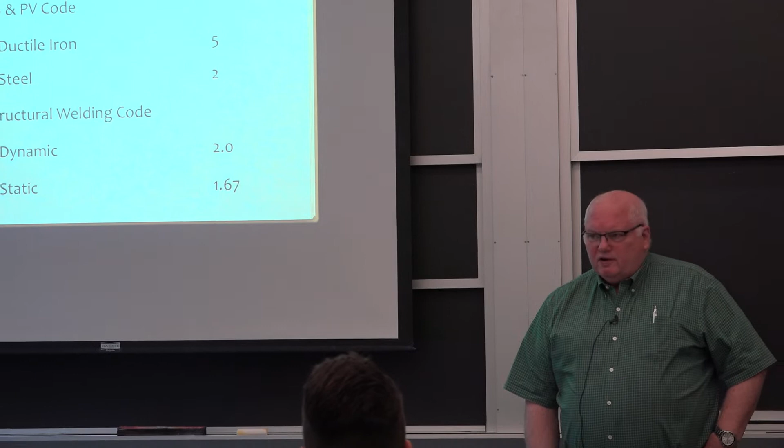I thought for structural materials, rather than talking about Harvard and MIT and things like that, we could talk about factors of safety. You're a mechanical engineer, how many of the rest of you are mechanical engineers? Okay, so 3 out of 5 of you here are mechanical engineers.

So what do you understand a factor of safety to be? The amount that you'll build or tolerate something to, so it's the maximum threshold you'll operate at, and then however many extra factors it can theoretically go to until it breaks. Right, that's your factor of safety, so it's the capacity or capability of strength, if we're talking strength of materials.

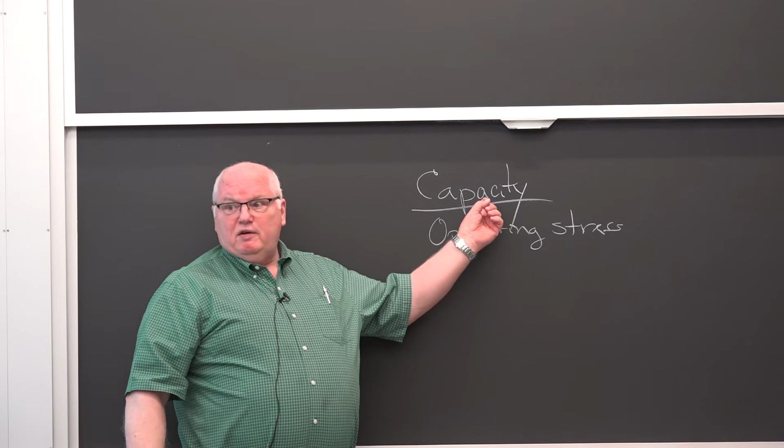Dr. Belmar, being more of a mechanical engineer, calls it the capacity divided by operating stress. So if the capacity is a stress, how much does it take to break it, or fail it? You have to remember, in some cases failure is not breaking something. A lot of times we think of breaking something in two as the failure stress, but you could have failure if something starts to deform, which would be the yield stress.

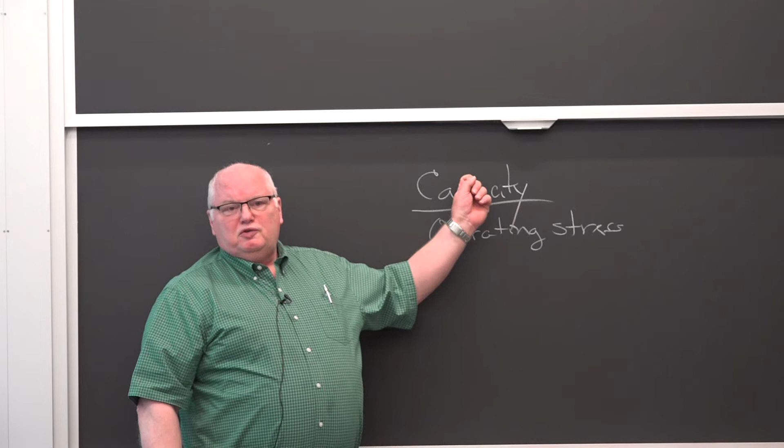And the operating stress is often defined by a code or standard. We're going to go through that, I'll talk a little about it, stop me if you have questions, it's supposed to be a recitation after all. The capacity is the capability to support a stress, and the operating stress is what you'd calculate from mechanics as your nominal stress, often defined by some code or standard that's been around a while.

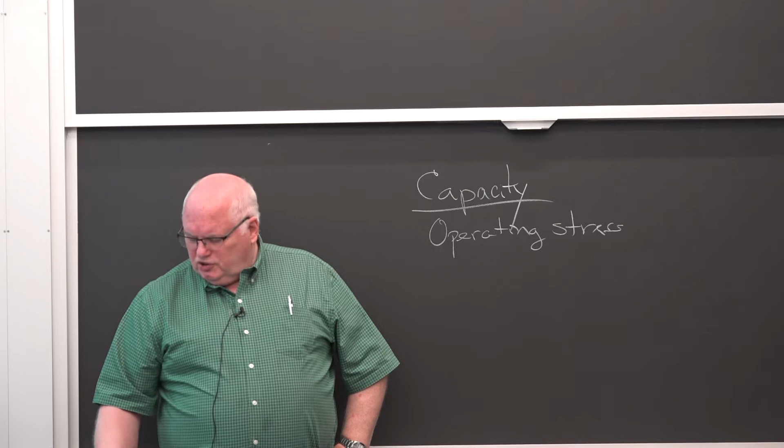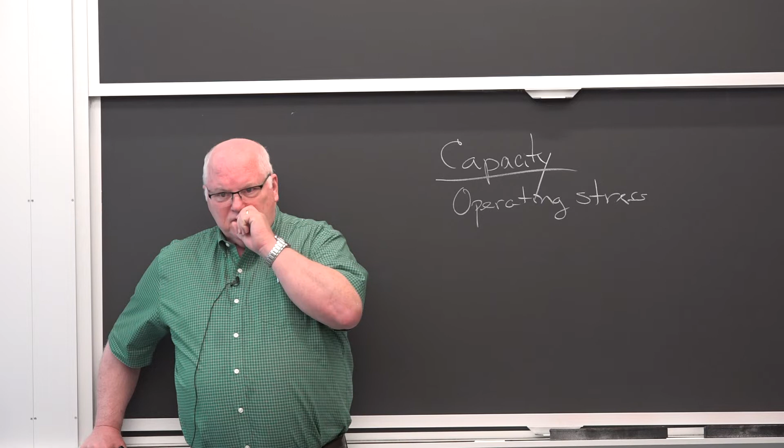The oldest factor of safety I've seen, some books go through and talk about bridges, a couple of books on the history of engineering written by civil engineers. Remember, civil engineering - if you watch that thing where I talk about the history of engineering, the first engineering school was West Point in the United States, and it was military engineering. The next engineering school I've learned since, it's not Rensselaer, it's actually Norwich in Vermont, which had an engineering program in 1820, and RPI wasn't until 1824. But RPI is obviously a more well-known engineering school than Norwich now.

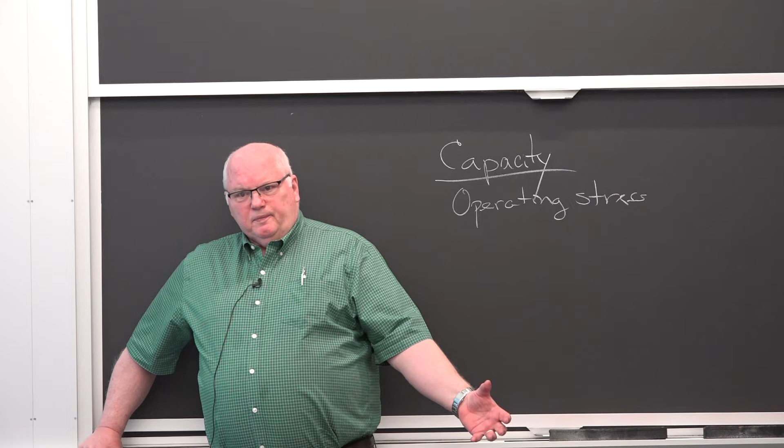Norwich is still a small school, a good school, but smaller. Anyway, it wasn't until the 1820s that they both came along with something they called civil engineering, to distinguish it from military engineering. Originally engineering was military - building breastworks, dams, and bridges for catapults and things like that. Then with the Erie Canal, Norwich and Rensselaer being near upstate New York, started producing students who could help build the Erie Canal.

And so civil engineering was really the only main type of engineering. It was really MIT in the 1860s that started breaking things up - number one at MIT, course one, is civil engineering, okay? But the bridge designers - and I did find some references about 1850 - had a factor of safety because they were just beginning to be able to calculate the strength of a beam. If you go back, Galileo has a picture of a weight hanging off a beam.

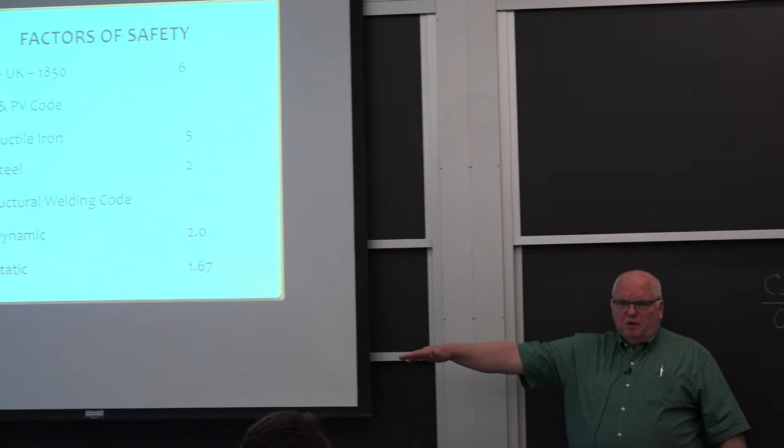He was doing experiments, kind of Galileo's way of doing things, to understand the strength of a beam. They started developing those equations in the mid-1800s, so they could calculate, kind of like a sophomore in mechanical engineering, the strength of a bridge, and they found a factor of safety around 6.

About that time they actually had a commission in 1850 in Britain that determined they should have a factor of safety of 6, because before that it was all sort of, well, I built one like this and it didn't fall down for the last 50 years, so I'll build one similar to it. Then someone would come along with a different material or design to save some money or time, and the factor of safety would go down and things would get worse and worse. History has a way of repeating itself.

You've all seen the Tacoma Narrows Bridge failure. The Tacoma Narrows Bridge failure in 1940 was an example of making things too slender. The winds came down the Tacoma Narrows, and this thing they called Galloping Gertie. I saw it in my freshman physics class here at MIT, and they were teaching waves—you see the waves on this bridge.

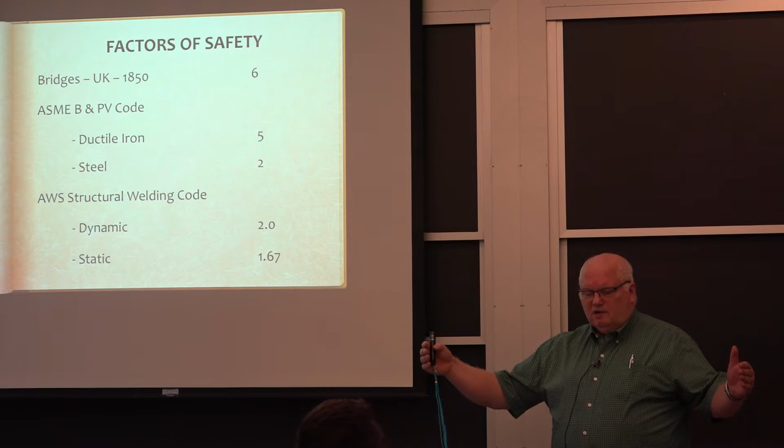But the boiler and pressure vessel code actually came about—I used to have a picture, I probably ought to go dig it out again—of a shoe factory down here in Brockton, Massachusetts. The boiler blew up, kapow, around 1905 or something like that. And the ASME decided we're getting tired of this.

Turns out the first research contract ever let by the U.S. government was in 1836 or something. Some steamboat on the Ohio River blew up, and Congress actually appropriated some money for someone to go figure out why these boilers were blowing up and killing people.

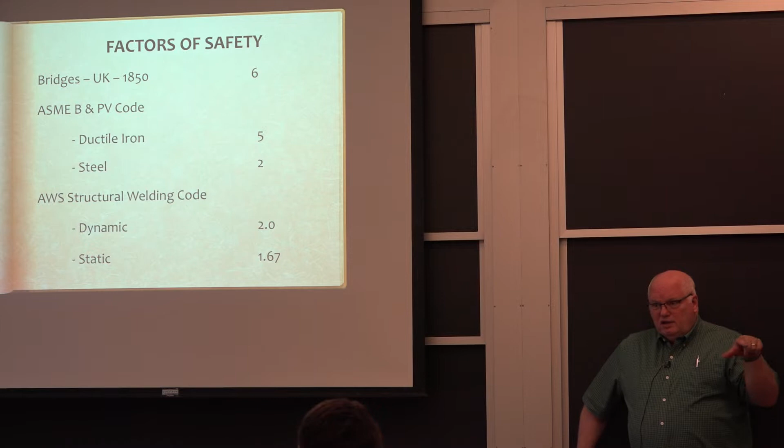So pressurized boilers—you know the Barlow formula, sigma equals P R over T, right? Pressure times radius divided by the thickness. Those types of equations were around, and the boiler and pressure vessel code is the world code today.

There are some countries that don't use it. Mainland China doesn't use it because they don't want to spend $16,000 to purchase a code. They basically have their own codes, and they sort of copy what's in the boiler and pressure vessel code, and they don't care about copyrights and things like that.

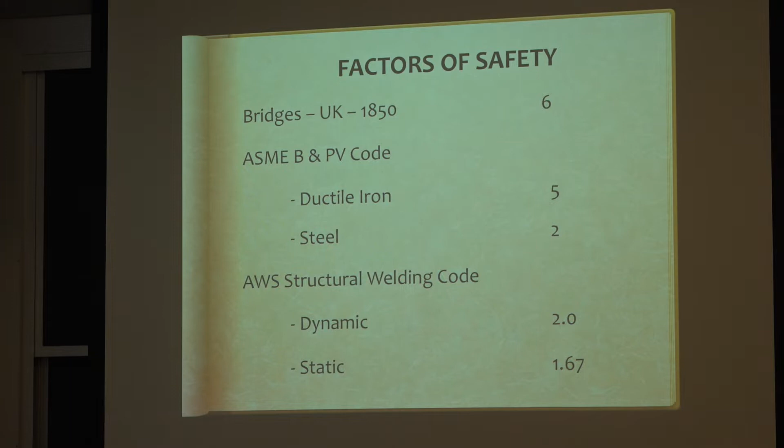But you can't make a boiler or pressure vessel out of gray cast iron because gray cast iron has lousy fracture toughness. You can make it out of ductile iron, which is almost like steel, but even so, ductile iron being a casting can have larger flaws, and they require, even today in the code, a safety factor of 5. Whereas typically for steel—and there are different safety factors, the code will have different requirements for different nozzles and connections—but generally for steel it's about a factor of 2.

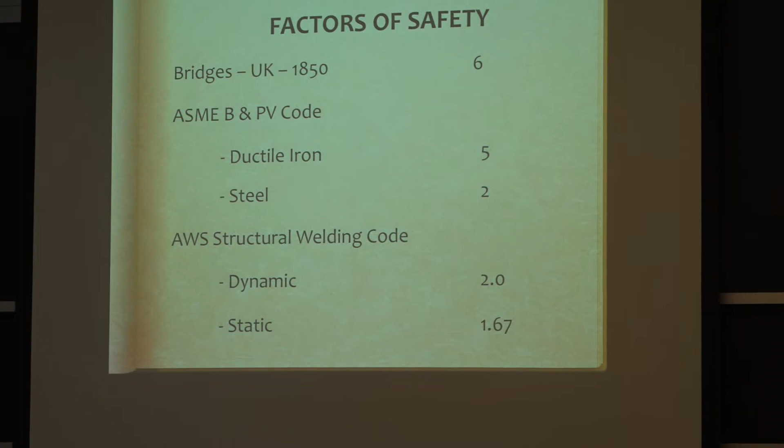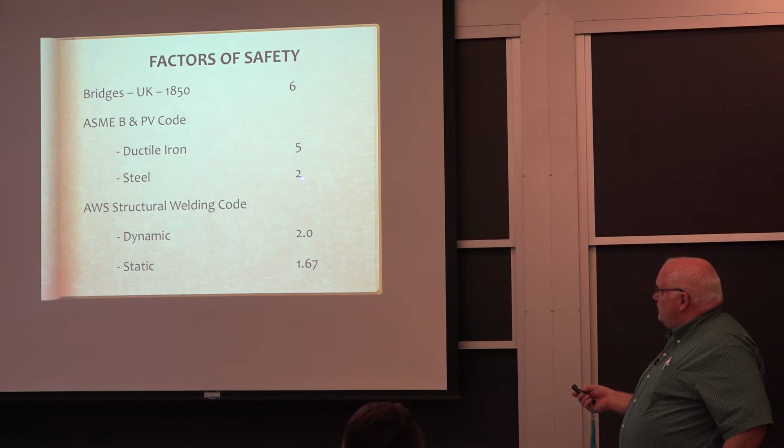You can say, well, is that based on yield or on tensile? It's sort of based on tensile, but if we're talking A36 steel of 36 KSI yield, it turns out about 18 or 19. They have a table, and it depends on the specific steel—there's lots of experience over the years. But it's basically 55 or 60% of tensile, which gives you a factor of 2 of safety. If you go through this, the operating stress is 55 or 60% of tensile. When you get to higher strength steels, things change a little bit, but in general, a safety factor of 2 is good for steels.

Why? Those of you who are mechanical engineers—what do you know about fatigue of steels? Do you know anything about fatigue of steels, and why they would choose a safety factor of 2? If you look at the old-fashioned S-N curve, where you look at stress versus number of cycles, you'll find for steel it comes down and tends to level out, and we sometimes call it the fatigue limit.

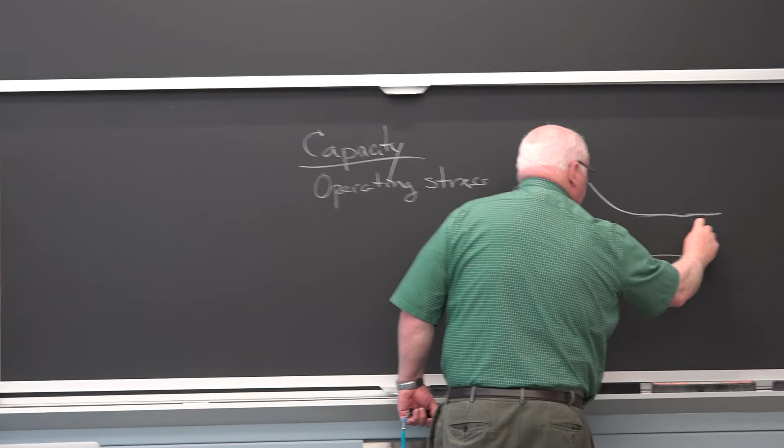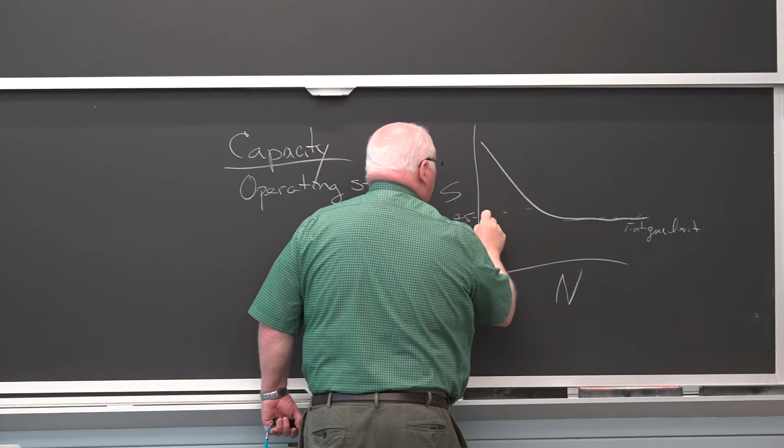It's at 45 to 50% of the, typically it's the tensile stress, okay? That just, now, aluminum doesn't have a fatigue limit.

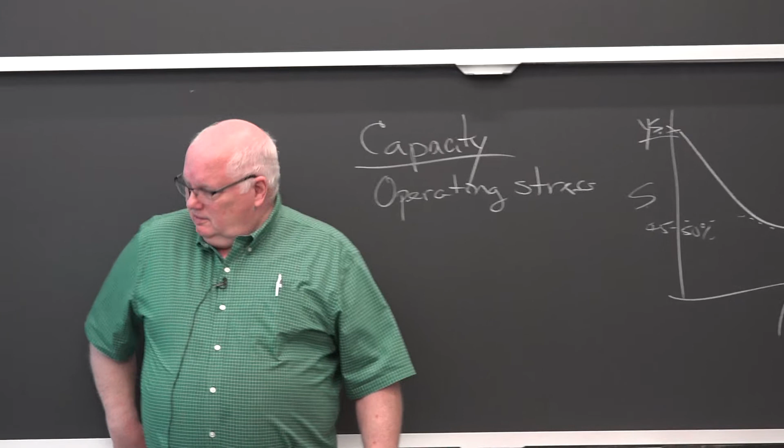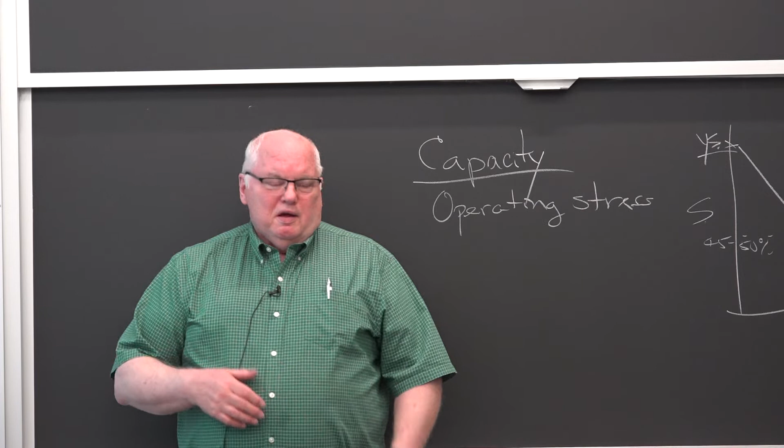You're putting enough work in the material, it'll heat up on you. So you have to be careful when you start going to such long tests. Usually, we're talking way out here at 10 to the 8th. Usually these plots only go out to 10 to the 7th. This little break is usually somewhere around 10 to the 3rd, 10 to the 4th, 10 to the 5th, so where that curvature is in there. So 10,000 cycles or so, we go from what we call low cycle fatigue to high cycle fatigue.

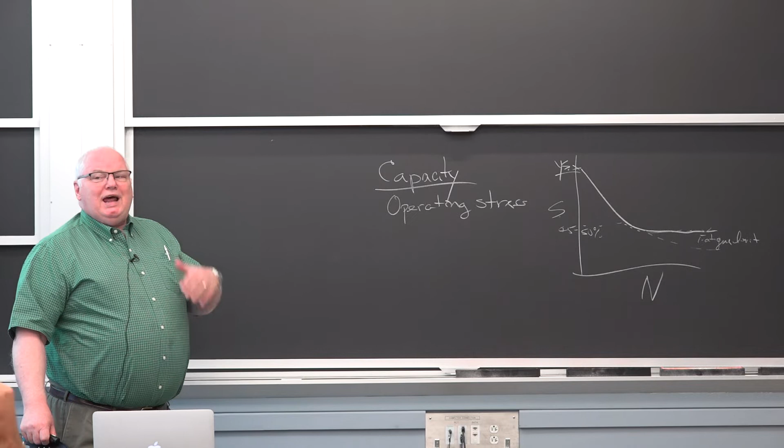You have a factor 2 safety and you're good, okay? You shouldn't have a fatigue problem unless you have stress concentrations and other things. So that's why we have safety factors of 2 for steel in the boiler and pressure vessel code. They have all kinds of things to take care of stress concentrations in the design, like reinforcements around nozzles and stuff. I've seen failures in pressure vessels.

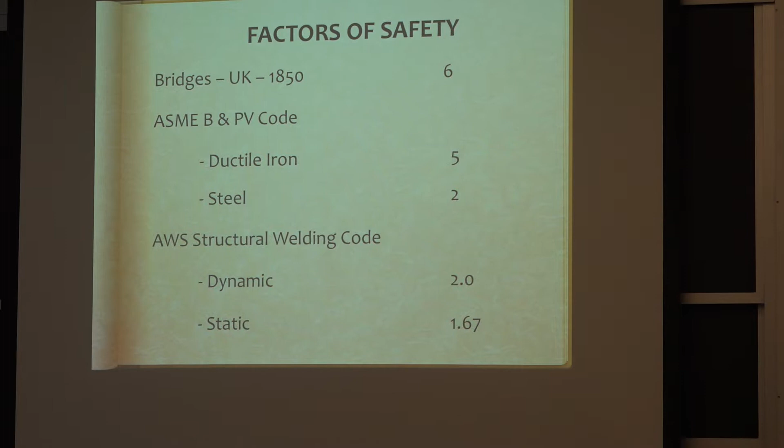Well, first of all, the boiler and pressure vessel code, virtually all of these codes in the very beginning, they'll have a scope. The first paragraph will be scope of this code, and it will tell, actually the first paragraph might be the first 3 pages in the boiler and pressure vessel code. It doesn't apply if you're less than 100 psi and 1.5 cubic feet, I think that's right, or 15 psi and 1,000 cubic feet.

Basically, it's pressure times volume. How much energy did you store in this pressure vessel? If it doesn't have much energy, we don't care, is basically what ASME says. The explosion won't be that big, okay? If it's got a lot of pressure or a lot of volume—I can't remember what the 2 numbers are right now, there's a couple of different ones—but basically, they're just saying with a certain amount of energy, you're going to have a big enough bomb that you don't want to be there if it goes off.

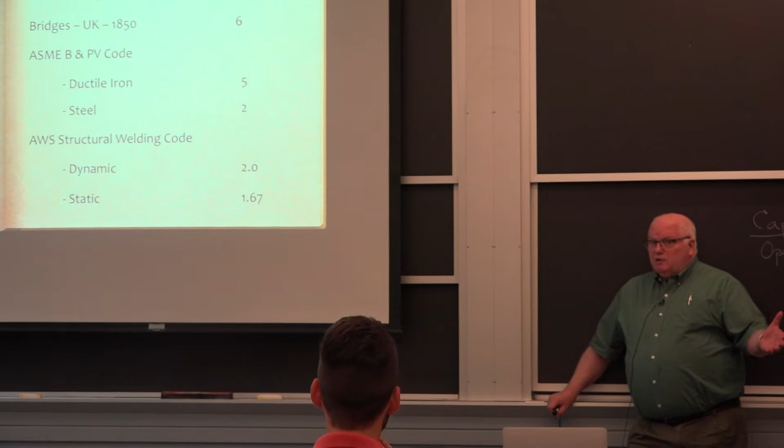The American Welding Society Structural Welding Code has a static and a dynamic. Static for buildings is 5/3. World Trade Center was 5/3. Okay, I gave you an article I wrote, and I used that 5/3. I knew that principle, it's in the code, and that building would have been built to the AWS Structural Welding Code.

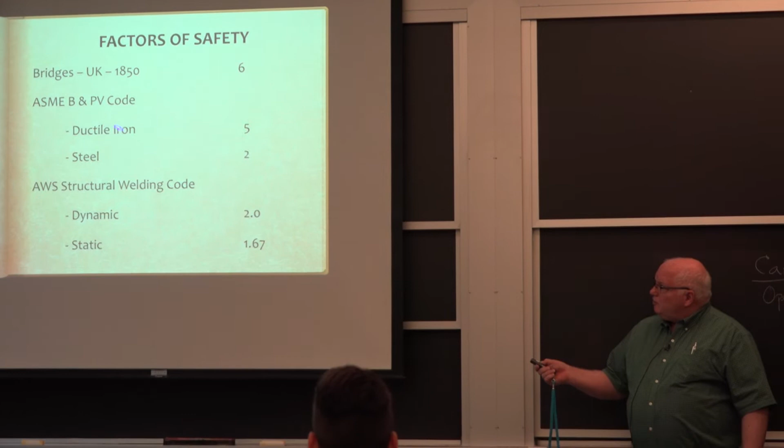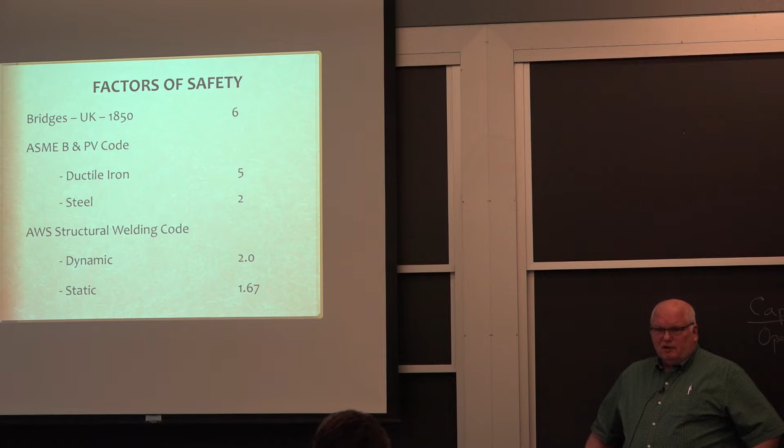These are the 2 major structural welding codes in the world. Almost everybody except the Chinese and a few third world countries uses the ASME code, even though it's a US code, because it's sometimes called the granddaddy of all codes. The AWS Structural Welding Code kind of is a companion to it, but it's basically has something for bridges, dynamic, and something for buildings, static. Bridges, of course, are dynamic with trucks going over them and things like that. Dynamic, why 2? Because you got fatigue. Buildings, it's not really fatigue, not at the high level of stress. So those things sort of make sense.

Then, OSHA for ladders and scaffolding, if it's man-rated—which means I got a cherry picker and someone's going to be up there in the basket—factor of 4. Someone could die. If it's in OSHA, if it's more than 6 feet off the ground, you got to follow the code, because if you start figuring out the energy of a fall, you can break your back from a 6-foot fall. You won't break your back from a 2-foot fall. There's not enough energy to break, unless you've had other problems health-wise ahead of time.

So man-rated equipment, ladders, scaffolding, these lifts, everything will be 4.0. Just an extra factor of 2 for a little extra safety. It's still the same steel.

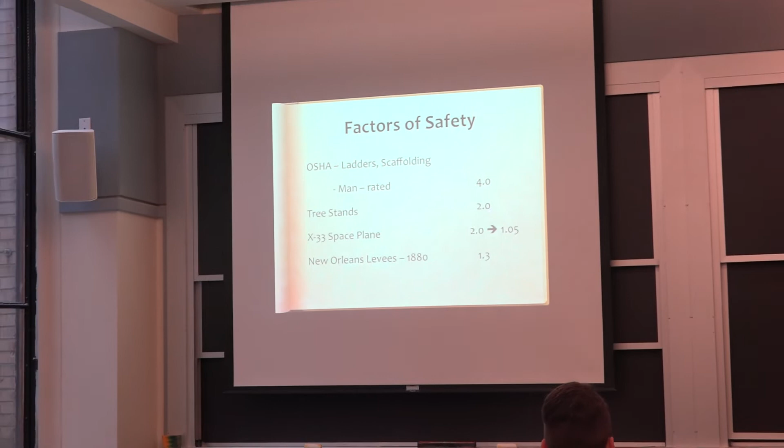Tree stands don't come under the boiler and pressure vessel code, it's not a pressure vessel. They don't come under that either, they have their own tree stand manufacturers association, and that's only in the last 15 years or so. But people are dying or being maimed by tree stands falling out of the tree with the people on them all the time, okay.

Oh, you're not a hunter, obviously. Neither am I. But if you were in Pennsylvania or Colorado or places where deer run wild, they'll go to the store and buy a little tree stand. There are lots of mom and pop shops. Some guy is a hunter who says he's got a better design, even though he doesn't know anything about design, and starts making and selling it at Cabela's or Bass Pro Shops. You carry this thing in, usually made of aluminum so it's not too heavy, climb the tree, wrap it up there, and sit and wait for Bambi to come by so you can blast him. Or if you're a really good hunter, you use a bow and arrow to slice right through Bambi's heart. Does that explain it? Okay.

Some of them have canopies. Some of these things get very elaborate. But it's something, if you don't have anything else to do with your life, you go out there and wait for Bambi to come by in the fall. The thing is, at regular ground level, the animals will smell you, and the deer know when hunting season comes, so they're more skittish in the fall anyway. But people will sit out there 8 hours a day in the cold, waiting for their buck to come by, counting the points on the horns of the antlers.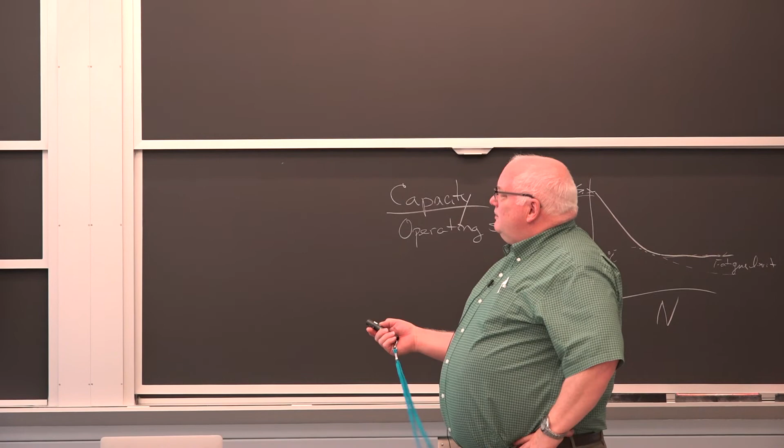The X33 space plane was supposed to replace the space shuttle. They designed it for a 2.0 safety factor, but had some bonding problems. I talk about it in some of my lectures, I don't remember which ones. But they had problems, and it was a $1.3 billion program.

These vessels that held the liquid hydrogen tanks were about the size of a house. I could have brought in the composite material, I have a piece of it. Very, very lightweight. Size of a house, and the basic structure weighed about 12,000 pounds. Very few houses are that lightweight.

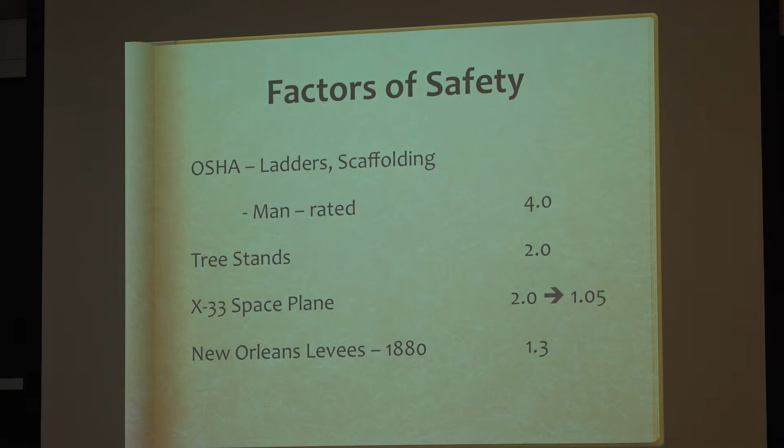But this had to go in space. They had some problems with the bonding of the carbon fiber and the Nomex honeycomb with the adhesive, and they didn't want to cancel the program. It was a rush program in the early 90s to demonstrate rapid prototyping, so they just recalculated their safety factor and found out they had a 5% safety factor. Good enough. So they put it to test in Alabama. The only place you can get 50,000 gallons of liquid hydrogen is Huntsville, Alabama, where they test rockets and things.

So they put it in test, and everything was fine until they started to warm it back up, and they were giving everybody high fives because they had passed the test. They were going to put it in a prototype and go from Edwards Air Force Base to Dugway Proving Grounds in Utah, get up above 100 miles, actually get to space and prove out the design.

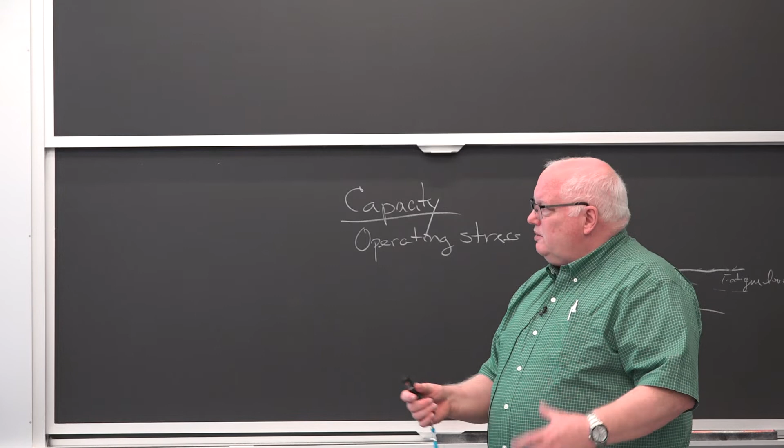But then they saw a pop. All the frost on this thing is on the video because no one's going to be near this - this is a bomb, okay, 50,000 gallons or whatever it was. I have to go back and check, but it's the size of a 2-story house. It split open. Nothing exploded, but then they went back and found they didn't really have their 5% safety factor. This thing was a disaster from the initial fabrication, and they were just hoping they could get it to pass so they could keep their $1.3 billion program going.

NASA canceled the program.

In 1880, the New Orleans levees had a safety factor of 1.3. One of the civil engineers designing those was my grandfather. So there, Grandpa, you needed a bigger safety factor. However, back then, they were lucky if they could even calculate the safety factors, but they did.

So there's something on safety factors to give you some idea of the different ranges. A safety factor, it's hard to decide what you want to call your capacity. Your operating stress will be defined historically by the codes and standards. And then it's really a question of what risk are you willing to take, okay? And if it's man-rated, you want a bigger safety factor.

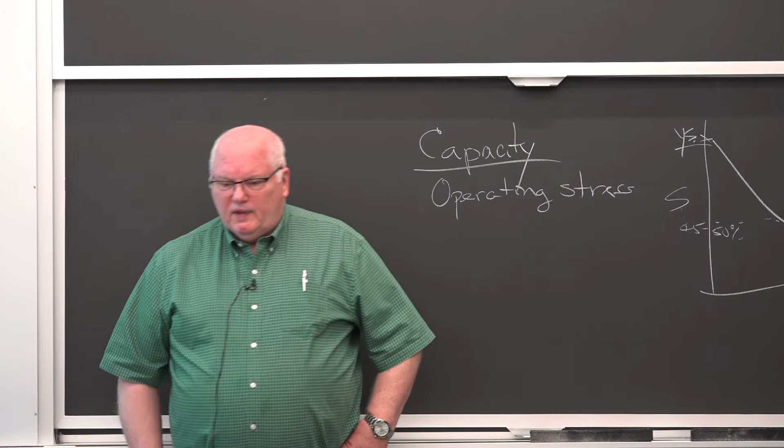I used to think, until I started working on them, that I'd never want to get in a helicopter. Those things are just, as they sometimes call them, flying fatigue machines, right? But as I got in and started doing some helicopter failures, it turns out helicopters tend to have a safety factor of about 10 on most parts. And believe it or not, they're weight critical, but they've had enough failures over the years that they do a lot of work. If you actually look at the designs and calculate safety factors, you find helicopters have tremendous safety factors, which is why most helicopter accidents are pilot error, okay? We could go through some of that.

Okay, so that was one thing. We could talk about safety factors. So just a couple of slides that I put together some time ago. Anybody have any questions? I could go through some other things.

What types of things are you interested in? I might as well, there's only a few of you, I might as well try to do some things that you might be interested in. So I gotta find my cursor. Where'd my cursor go? Well, I have something on bolting here too, but oh, here's my cursor down here.

Bolting. Okay. Anybody have any questions? No questions?

Okay, so I served on a committee about a year and a half, 2 years ago, commissioned by a department, part of the Department of the Interior, called BSEE, Bureau of Safety and Environmental Enforcement, or something. But BSEE is basically the part of the Department of Interior that regulates things like offshore structures in the Gulf of Mexico. They were the ones, their predecessor, they changed their name after the Deepwater Horizon, the BP Horizon failure in the Gulf, you know, the big oil well blowout. They had a different name before that, trying to hide afterwards.

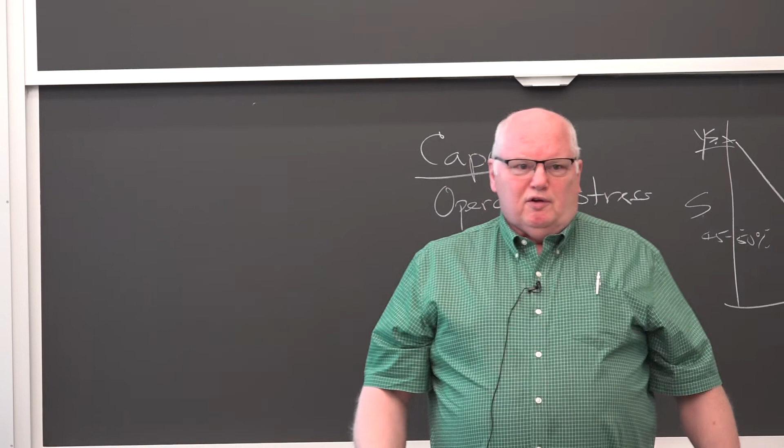Does anybody know what the National Academies and the National Research Council is? You probably don't know about these things, right? So in 1863, Abraham Lincoln chartered the National Academy of Sciences. And it's not a government agency, but it has a charter from the president to advise the government, or governments primarily, it can be state governments as well, on matters of science and technology.

And for years, it was sort of an old boys club. They're now trying to get more women and minorities, but slowly. When I say old boys club, in 1966, the National Academy of Sciences was being politicked that they should have something separate for engineers. So they formed the National Academy of Engineering, 16 people, of which 2 or 3 were MIT professors, one from this department. Was it Phil De Bruyne? I think it's Phil De Bruyne. But anyway.

And they ended up electing, you can only be nominated by people who are already members, nominated and supported by people who are already members. So when I say it's an old boys club, started out with 16 men, and for years it was almost all men. Now it's about 15% female and like 1% or 2% minority. But anyway, the average age of election is about 69, okay?

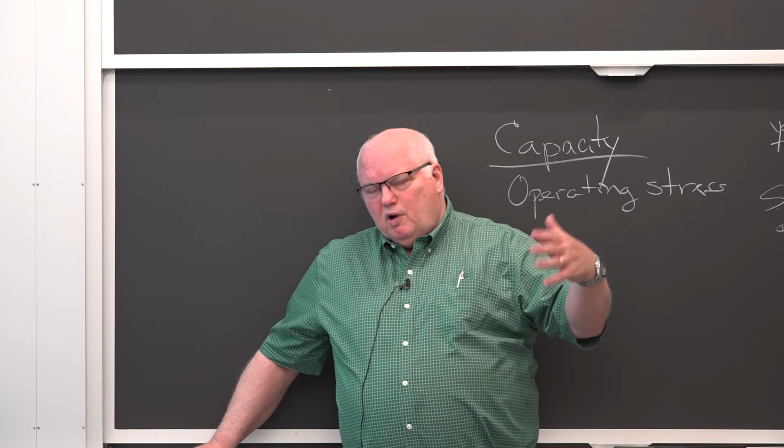When they have a study, it'll list there's 15 or 16 or so of us on this committee. About a third of them might be members of the National Academy, these elected old boys, and the other people will be put on because of their expertise. Well, we're all put on because of our expertise, but other people who are not as old and senior will be put on because they have particular expertise.

So I've served on a number of these. I served on one for the Army Ballistics Lab down in Aberdeen Proving Ground, Maryland. I've served on one for the Alvin submarine, about whether we could afford to build a new Alvin submarine and stuff. Anyway, I served on this one about bolting technology in a marine environment.

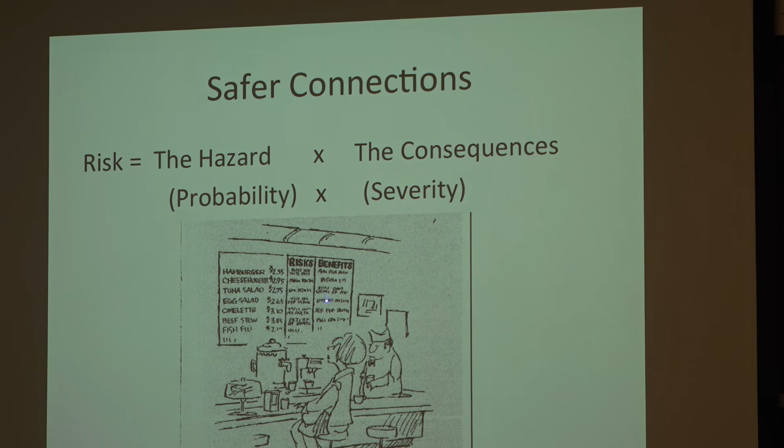There's actually a book from Harvard School of Public Health where risk is equal to the hazard times the consequences. This isn't unique to that book, but it applies to risk and benefits of hamburgers and cheeseburgers too. It's the probability of an event times the severity or consequences of the event.

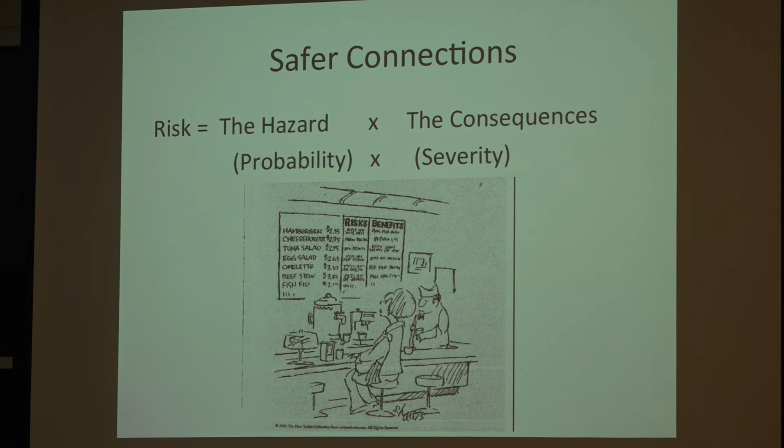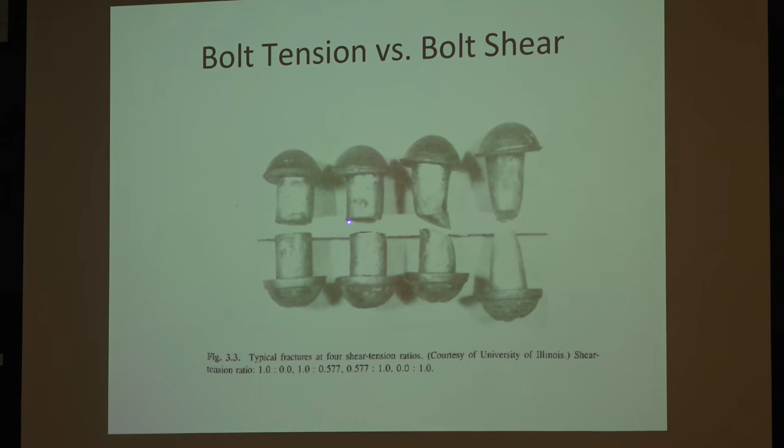If you look at some books on bolting, these are typical fractures at four shear-tension ratios. This is a ratio of 100% shear, when you're just slicing it like a bologna. This is one time shear, and what's this, square root of 3 over 3 - I think that's an important parameter out of mechanics, a ratio. And it still looks like that.

If you get to tension of square root of 3 over 3, and the shear is square root of 3 over 3, and then the tension is 1, you start seeing a shear, or a 45-degree shear plane, and then you get a pure tensile load. So the type of failure in a ductile joint can vary depending on the shear-tensile ratio.

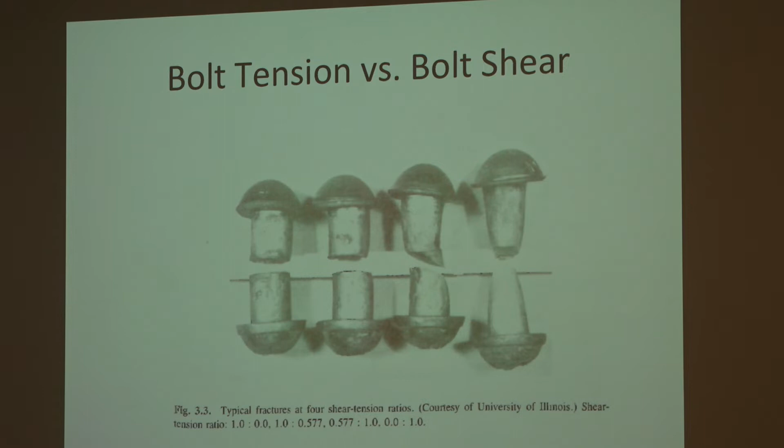The Macondo well, or the BP Horizon well, was - I can't remember - I think it was a floating production or a tension leg platform, I don't remember, but all kinds of complex things. These can cost $5 billion for the production platform. They're big, big things.

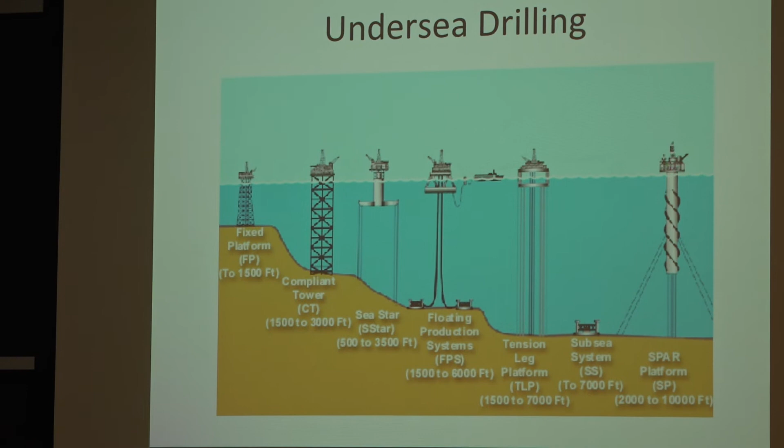They have blowout preventers - that's what failed in the BP system. That's a fence there, not a person, which could give a sense of scale, but these can be 4 or 5 stories tall. There are great big valves in here that shut off the flow if all goes well, down at the bottom of the ocean, maybe in 10,000 feet of water. There are six valves in this thing.

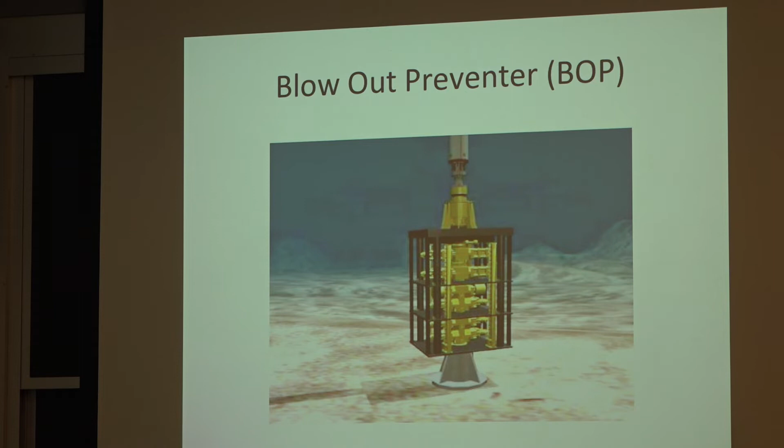Different types of valves, like shear rams, were among the things that failed on the BP Deepwater Horizon - not Transparent Horizon, that's a sculpture over by the dorm. But in any case, on BP Horizon, one of the shear rams had a problem where, if all else fails, they have big shears supposed to squeeze the thing, cut it in two, and seal it - just big hydraulic rams.

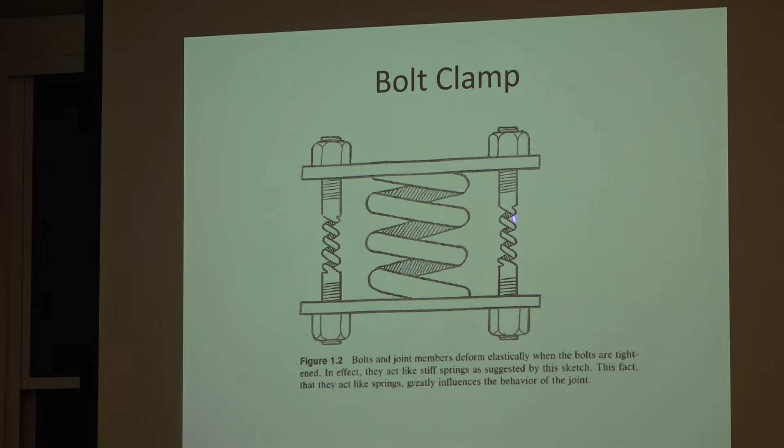You can analyze bolts in terms of a spring model. The bolt is a spring, and then you have compression between your two things - a fairly small spring force here can generate significant spring force here.

You have lots of stress concentrations in bolts. Tensile stress, and here's a higher stress down here near the threads and the nuts. Stress goes up because of the reduced section from the threads, and then other things. There are all kinds of high-strength bolts.

Some of these critical structures have bolting things that you wouldn't even recognize as a bolt.

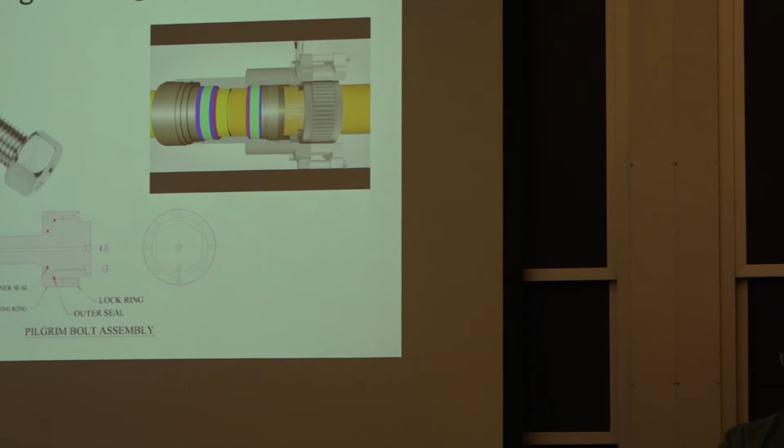But it turns out one of the problems with bolting is most people - anybody ever used a torque wrench on a bolt? What do you think the accuracy of that is? Pretty bad, plus or minus 30% in some cases. But that's what people use when they're trying to be precise in the strength of the bolt.

To get good fatigue strength in the bolt, you want the bolt to be tensioned to 70% to 90% of its yield strength in order to get good fatigue resistance. And you've got plus or minus 30% as your ability to do it.

So in really critical applications, such as where I first saw it, on the crankshaft of an airplane engine, they actually grind the top of the bolt and the bottom of the bolt to an exact dimension, and someone takes a micrometer - this thing is 2.62 inches before they tension it, and after it's 2.68 inches. So it's stretched 0.06 of an inch.

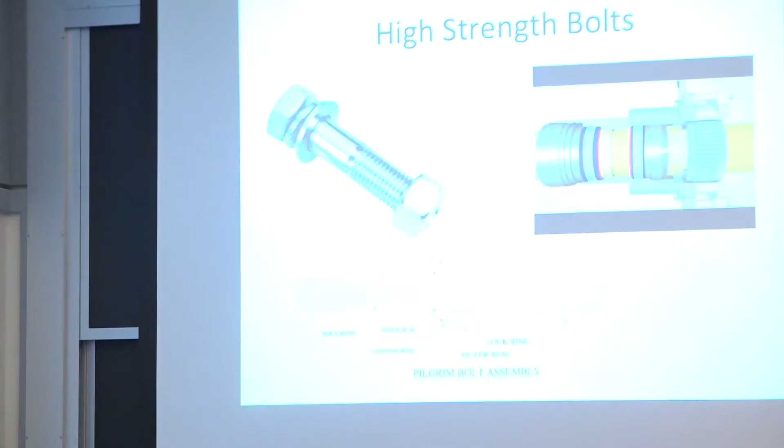The stretch, Young's modulus, is pretty well known, and you can get down to plus or minus 10% of your stress in your bolt, which is what you really need. And so they sometimes have holes down the center of bolts where you can put a little gauge, if you have longer bolts. For those little small piston engines for the prop aircraft, you just need a 3-inch micrometer, but that's what people use.

There's a guy who's a graduate - actually I think he may have passed away now - John Bickford, a graduate of mechanical engineering at MIT, wrote a book about bolting. It's got a long title but it's about 1,200 pages long. John Bickford knew more about bolting than anybody else in the world.

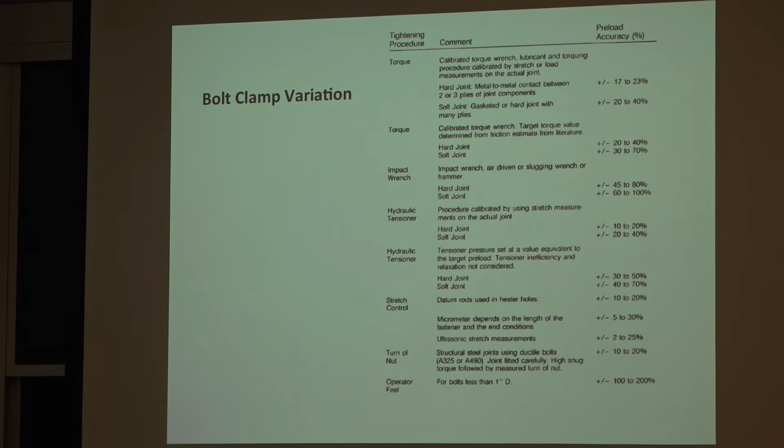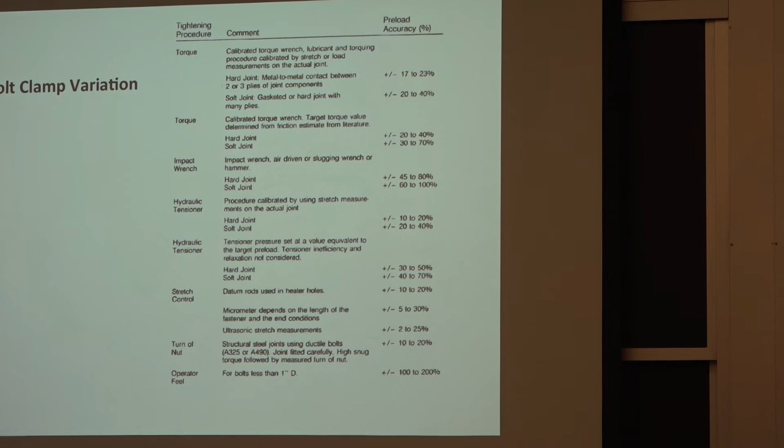So when people were putting bolts in a nuclear reactor, you hire John Bickford, because he knows how to bolt things together properly. Why do you use bolts? Why don't you just weld things? You got to take it apart. Right, exactly - it's harder to take welds apart. You can do it, but it's harder.

But anyway, here's something Bickford did for the Nuclear Regulatory Commission. Bolt clamp variation: calibrated torque wrench, plus or minus 17 to 23%. Hard joints, soft joints, which is the compliance of the joint, plus or minus 20 to 40%. That's my plus or minus 30, I said.

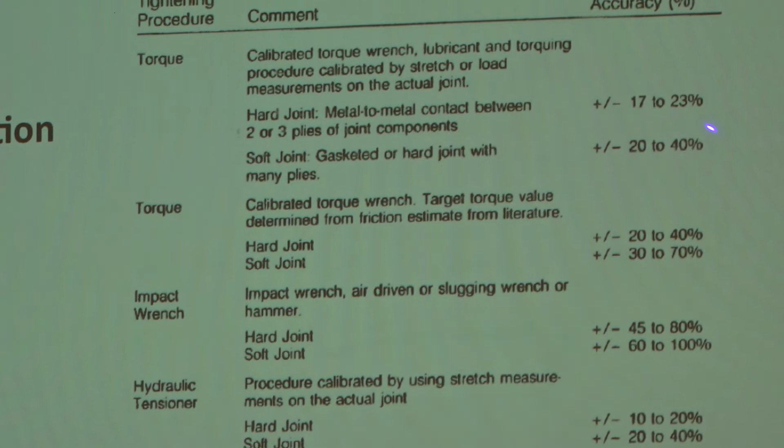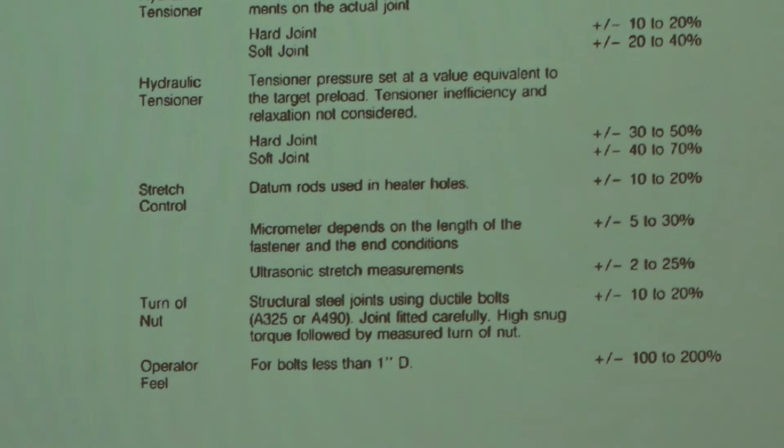And you can use torque wrenches, impact wrenches, hydraulic tensioners, stretch control. Stretch control is measuring the elongation of the bolt with the micrometer. Now they actually use ultrasonics to measure the stretch of the bolt. You can measure the length of the bolt fairly precisely before and after tensioning. But even stretch control is plus or minus 10 to 20%. Turn of the nut, plus or minus 10 to 20%. Operator feel, plus or minus 100 to 200%.

Now, a lot of times, people are using plus or minus 100 to 200%. And by the way, on the offshore structures, torque wrenches are plus or minus 30%. And they wonder why they have failures when they put these things down in the ocean.

So what's between a torque wrench and a micrometer? For those of us out using it, torque wrench is plus or minus 30%. What can you do? How do we get greater accuracy without going to that extreme?

Well, you actually have to plan for this. There are some methods you can use with big bolts - you can use hydraulic tensioners in some cases. It's not just someone feeling it or using a torque wrench, which is sort of crude anyway. With the hydraulic tensioner, you're measuring pressure on a hydraulic cylinder, so you can get that within 1 or 2%, which gives you, in some cases, plus or minus 10%. But that's when you get a bolt bigger than about 2 or 3 inches, and it's no longer just somebody's arm anymore - you need a hydraulic system tightening that. And you've got some bolts out there where the nuts can be this big around. So what's in between?

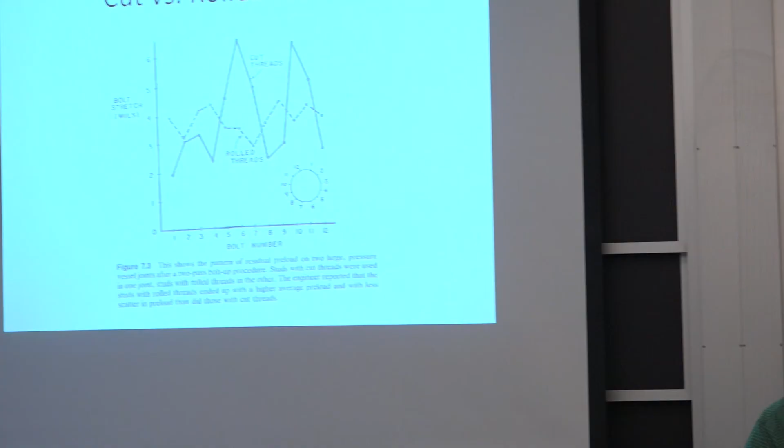Cut threads versus rolled threads. So if you have a smaller bolt, you can machine it and cut it. But most bolts nowadays, up to a couple of inches in size, they actually cold roll the threads. They have some hard dies that are at sort of an angle, and you roll this and make a thread by crushing things. So at the bottom of the V, you have compressive residual stresses, which gives you much better fatigue resistance. So you like rolled threads, for example.

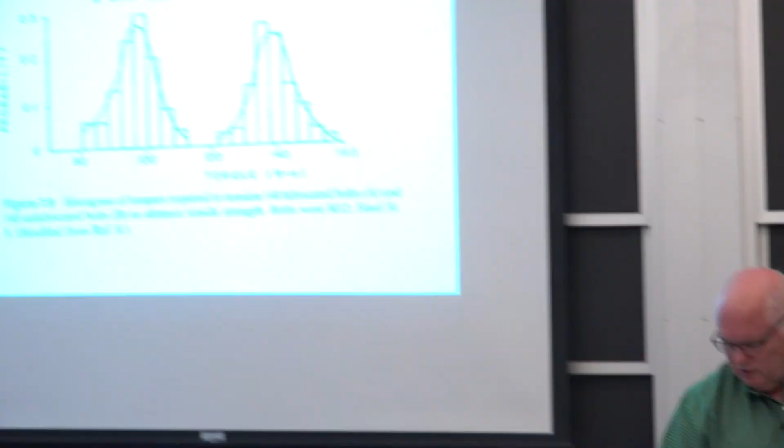One of the big things on the torque wrench, one of the big problems is lube control. If you're lubricated, you'll get the same normal distribution, but if it's lubricated, the torque will be much less than if it's not lubricated and you've got dry friction. And there's your plus or minus 30% right there.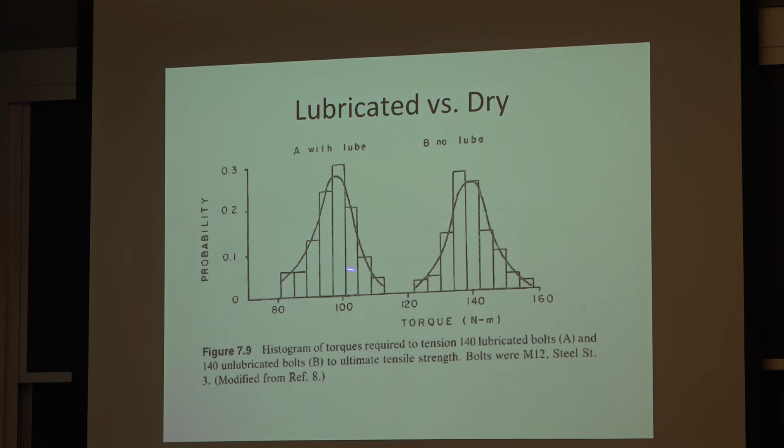So one of the things you can do if all you have is a torque wrench, you lube it. Are you saying lube the threads? Yeah, you put grease on it. You'll get a more consistent result.

Bickford has some nice little bullet points if you go to his book. One of them is some little couplet that goes something about if uniform torque is what you want, lube it, or something like that. It's a little bit better than that, but I don't remember exactly what it is. But basically, lubricated bolts will give you more consistent torque.

Could you maybe create a table that has stuff like materials, coefficients of friction, and all that? Oh yeah, he's got that in his book. If you want to know anything about bolting, just go to Bickford's book, and he's got hundreds of references to the mechanical engineering literature. People have studied this over and over and over. They just don't follow it. I mean, it's not that we don't know what to do. But lubrication is a good thing.

Torque turn: you torque it and then you do another quarter turn at the end, and that can give you a little variation, or some variation like that. That can actually give you some improvement, but you still get a histogram.

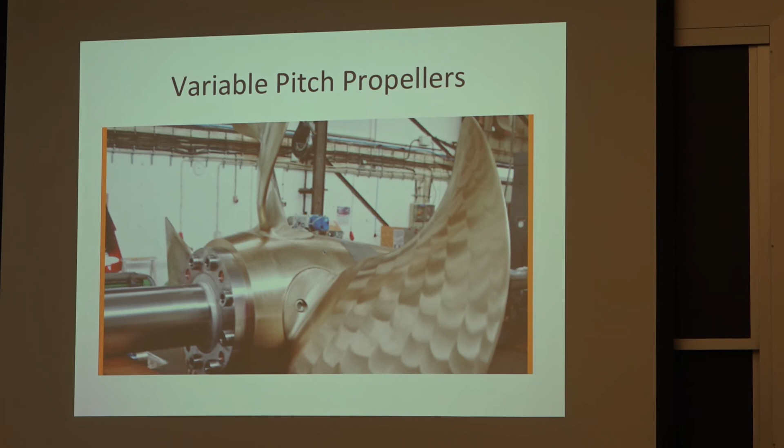There's some critical applications I went through, just some things I had worked on. This was actually a whole lecture once, but they're variable pitch propellers. If you want more efficiency in the drive of your ship at different speeds, particularly in some military ships, the propeller blade can twist depending on the speed you want while rotating, and you have a gearbox that changes the pitch of the propeller. Well, if you lose one of those bolts, you lose the ship, because now the thing's out of balance, severely out of balance. You're going to bend the shaft, you're dead in the water. And if you're a military ship, that's not good.

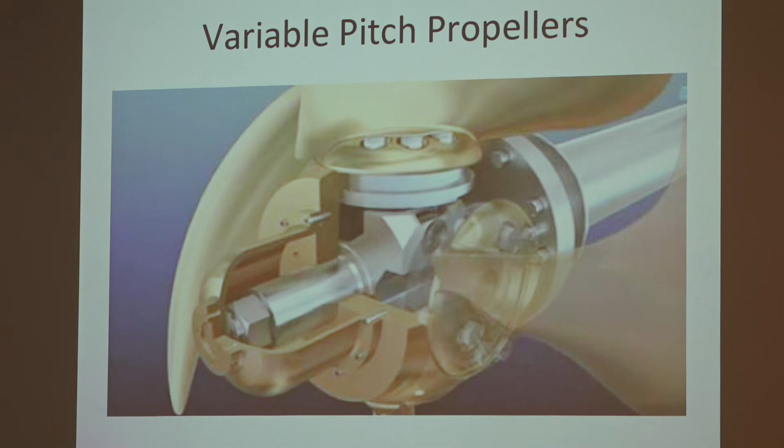So here's some of the internal mechanisms of one of these variable pitch propellers, a gearing mechanism in here. These bolts have holes down the middle. You put a long micrometer in there to measure the stretch. You don't torque those.

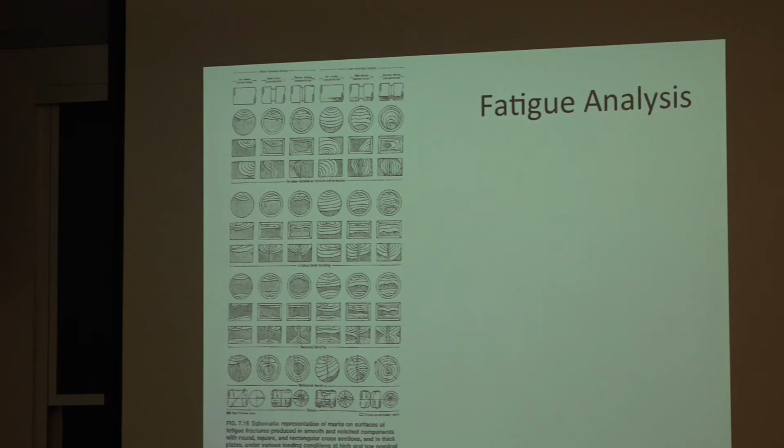I blew it up on the next page: high nominal stress, low nominal stress. High nominal stress, the final fracture area is the dark area, a high area. Low nominal stress, small area. Different amounts of stress concentration, tension or tension-compression.

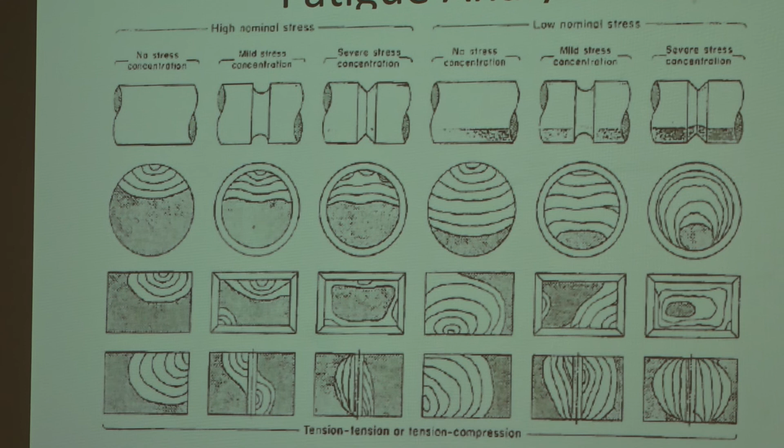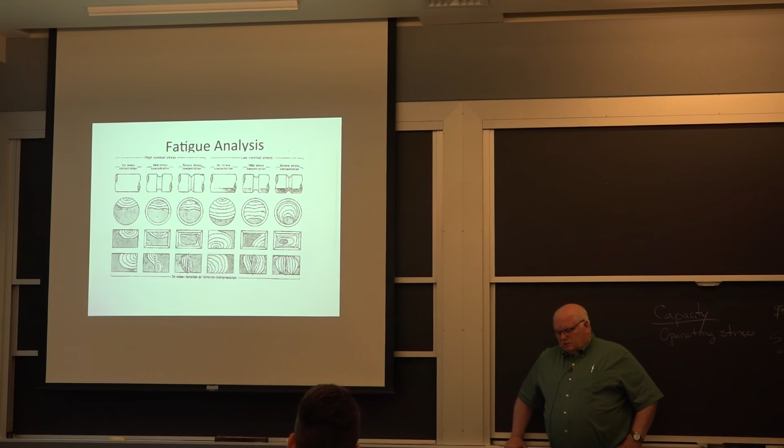If you've got experience, you can tell a lot about the fracture of a broken bolt. In fact, back 30 years ago, a nuclear reactor had a problem on some of its bolts, and I was working for a test lab - this is the early 80s - and they said, we're going to send you a bolt, and we're not going to tell you anything about it. We want to know what you can tell us about it from just looking at it.

So they sent it to us, and I looked at it and said, well, low cycle fatigue, moderate nominal stress, variable amplitude loading, because some of the fatigue cracks showed a difference in width of how fast it was growing, and it was operating at 600 degrees Fahrenheit, and they were all surprised.

You get blue coloring, and the temperature was not uniform with time, okay? You get blue coloring in your steel. They sometimes call it blue brittleness in carbon steels, but they call it temper colors, and the steel actually forms a blue oxide around 600 degrees Fahrenheit. Go look it up on the internet.

So I knew the temperature had to be - in some cases I could see the different striations and I could see the variability. I could tell the size from the high nominal stress, and I think I told them it didn't have a stress concentration, just by looking at the fracture.

Sort of like reading tea leaves, right? Except it's knowledgeable tea leaves.

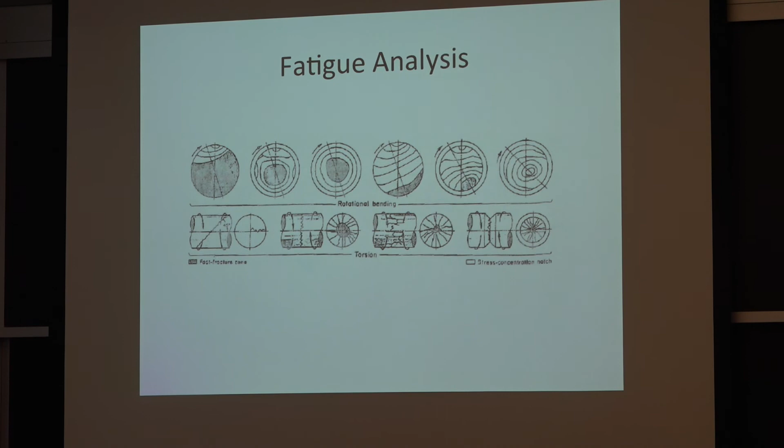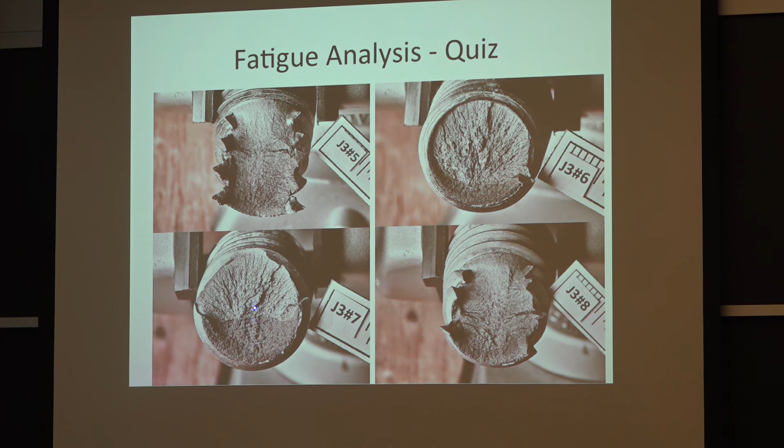Fatigue fracture right here, final fracture, high nominal load, ductile all the way - fatigue fracture nearly half of the way before it broke. The reason this thing broke down while they were erecting it was because some of the anchor bolts were broken. Why were they broken?

It turns out, actually, I don't remember if it was fatigue or if these were heat treating defects. But anyway, then I had another one.

This one was on a turntable, and you can see the fatigue crack A, B, and C. Low cycle fatigue, high cycle fatigue, low cycle fatigue - the final fracture has a different appearance to the fracture.

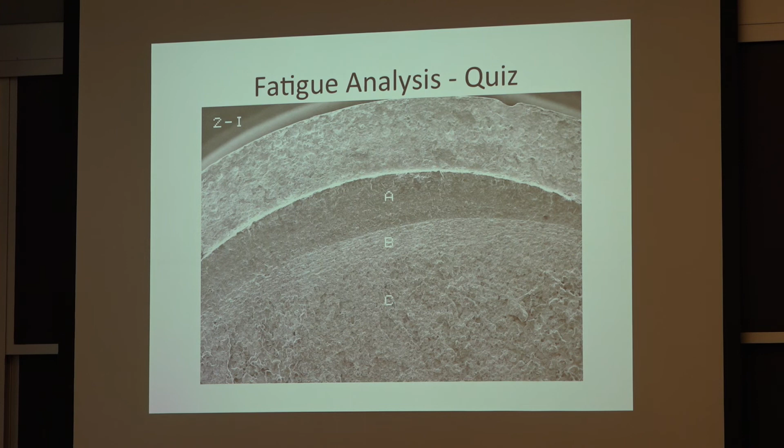And then I actually had a quiz for the students after some things. This is one where obviously the nut wasn't tight. It was peening itself apart.

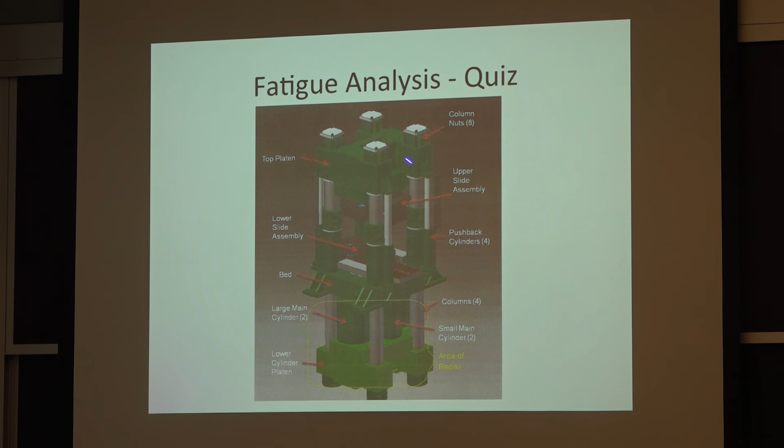I had another one with some really big bolts. This was a 50,000-ton forging press. There's only like half a dozen of these in the world. And the post basically has bolts, 4 big bolts, about 1 meter across.

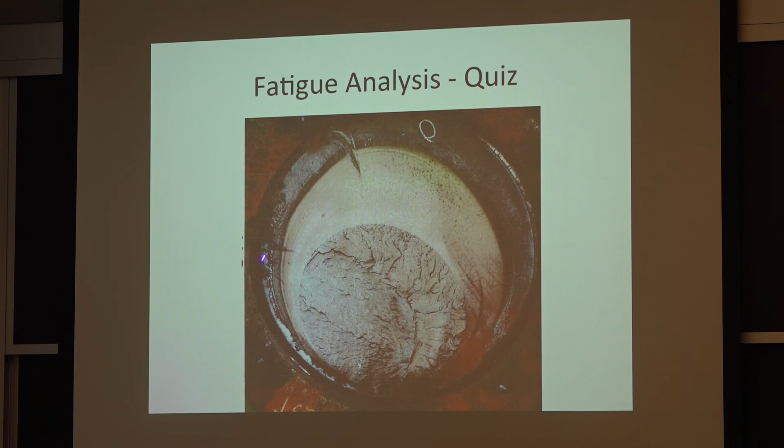So this one, stress concentration - there's the fatigue crack, there's the final fracture. They changed the steel, and they thought they were going to a higher strength steel and everything would be wonderful. Now it turns out the fatigue crack is this big, and there's the final fracture area. Yeah, it was higher strength, but it still broke due to fracture mechanics, and we won't get into the fracture mechanics right now.

But okay, lots of things you can tell about things if you get into all the details. I mean, one time they taught you about fatigue. One time they taught you about fracture mechanics. One time they taught you about heat treatment of steels. They all actually fit together. And if you want to solve the real problem, you've got to know something about all of them.